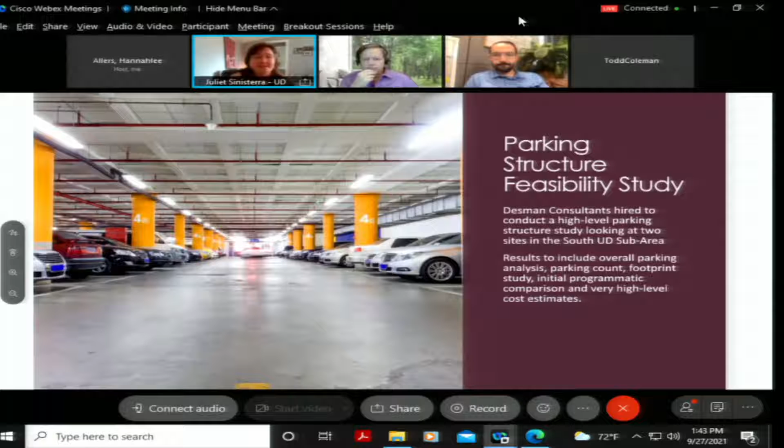We have two studies moving forward. The first is a parking structure feasibility study. Those involved with the UD for years know I was on the development committee in 2016 and 17, and we were talking parking structures then. We finally have high-level feasibility studies going on, analyzing parking counts, costs, egress, ingress, that sort of thing on a couple sites in the UD.

We're also moving forward with a TOD study with center-based planning and urban design, the same group, Jason Graff, that did the work for planning. We're having him look specifically at the Pine Street station, the BRT station there, and how build-out at that end and also at Sherman and Sprague could ideally encourage taking transit and more pedestrian and walking use. That is moving forward, it's like a four-month study.

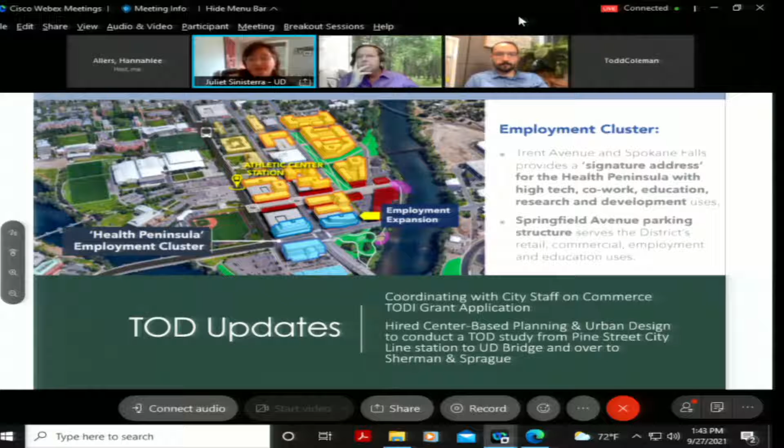We're coordinating with city staff on a commerce grant as well around TOD. And we've just started working with Gonzaga students on their senior project in civil engineering. They're going to be developing a UD bike-ped plan for our south area. I'm being supported nicely by Amanda and Colin Quinn-Hurst and Mike Tressider at STA, and we're meeting regularly with those students.

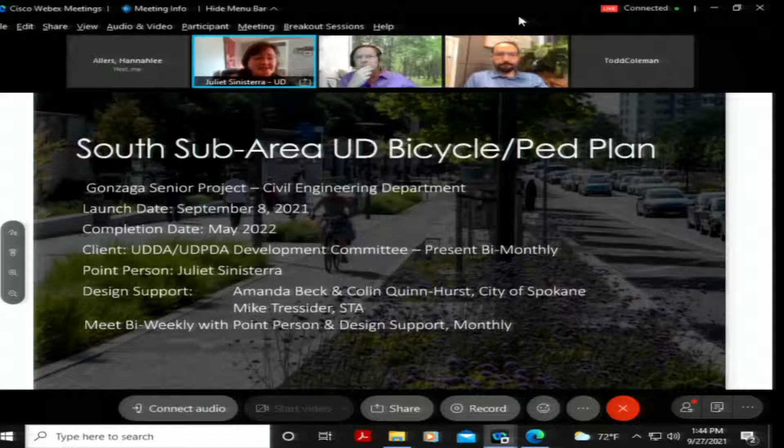Finally, we're talking with Boxcar, Catherine Miller and Kyle Tuig, about potentially the UD PDA working with Boxcar to get an initial lift of asphalt and maybe some initial curbing done along Riverside between Grant and Sherman. Boxcar wants to start marketing and leasing out properties in the spring, and they'd love it if that street wasn't just a dirt pile like it is right now. We're trying to be creative and think outside the box on how we can move this forward more quickly on behalf of Boxcar, and potentially Boxcar might partner with the UD in agreement with the city to get those improvements completed.

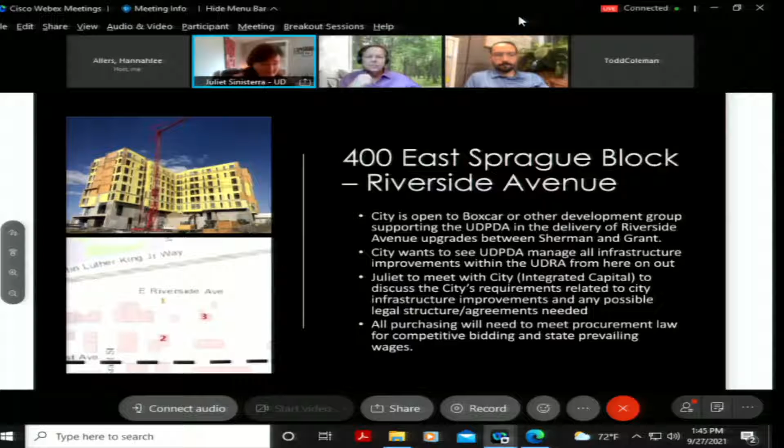So with that, that is all I have.

This is Brian. I'll just add something council is always super interested in, which is residential development in the South University District. You saw that photo of Boxcar, a very large apartment unit right at the south end of the University District Bridge. There's also a pretty big development at Riverside and Brown, workforce level housing, with potential to double in size just north of there. And farther east in the University District, the Riverbend project, which I'm thinking is about 300 units, something like that. It's pretty big. So there's quite a bit of housing going into the University District. I just want people to know that.

I'll add to that real quick, Brian. The Riverbend project is on hold right now due to escalating construction costs, so hopefully they can get back on track sooner rather than later. Both Dean Pape, who's doing the project on Brown, and Boxcar are interested in doing more housing in the UD. I've also been approached by Scott Shapiro, he's with Eagle Rock Ventures, originally from Spokane but now in Seattle. He does a lot of micro-unit housing around the country, often adjacent to university campuses. All three are really interested in doing more housing, but they also want to see more street-level activation and more uses in the UD before they jump the gun on too much more. So that's a lot of discussion we're having on the development committee, how can we encourage more ground floor uses to come in as well.

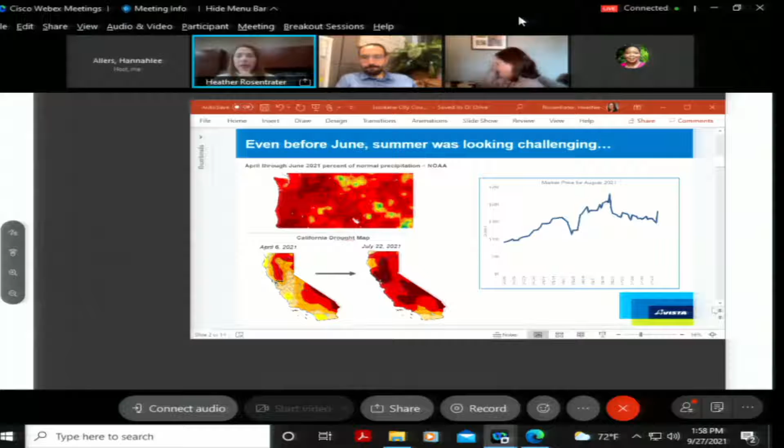Going to the next slide, as this June event at the end of June came closer, we looked at even more items on the supply side. We looked at purchasing additional power in anticipation of increased load and to minimize the market price volatility that usually comes with these heat events. We coordinated with our power plants to identify various contingencies and how we would respond to those contingencies to ensure we could serve our customers.

What was again unique about this event being in June is we normally have our generation units in a maintenance window, because we don't usually see those extreme heat events in June. So we had several units that were out for maintenance, and we focused on getting those units returned from scheduled maintenance as quickly as possible so they could be online before we experienced those peak usage days.

We were also coordinating with some of our large customers on the supply side, and Inland Empire has been a great partner, supporting a load reduction option for us that we did take advantage of during this June heat event to help ensure we had enough energy to supply our customers.

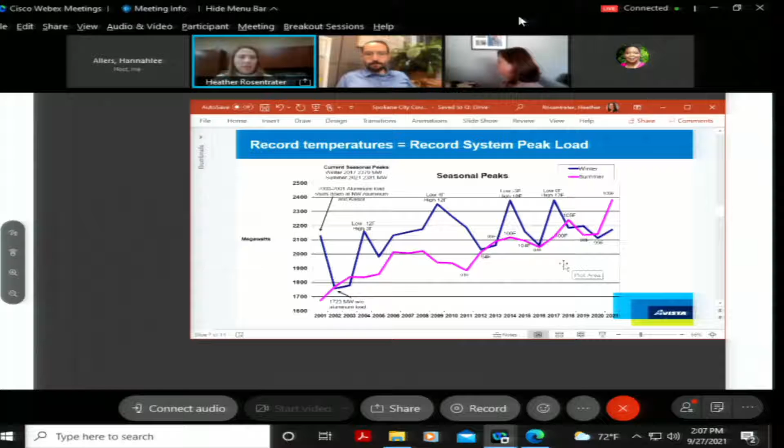A question that I've had, and I know many others have had, is how did we not see this coming? I can tell you on Monday morning when we met with our engineers and operators who are watching the system, the areas of the system they were specifically concerned about turned out not to be the areas where we had the issues.

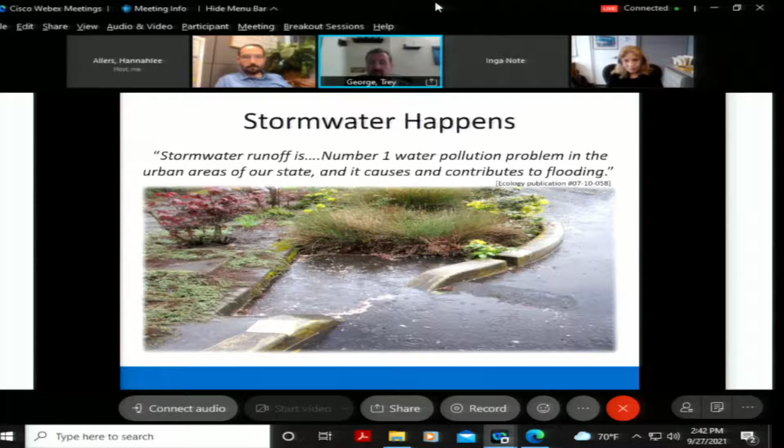So we have a permit system where ecology issues permits to municipalities. We are the recipient of this permit, the Eastern Washington Phase 2 Municipal Stormwater Permit. This is our permit number, and the permit area is the entire incorporated area of the city, with the exception of the CSO basins. The permit authorizes the city and its citizens to discharge stormwater to waters of the state of Washington - for us, that's the river and our aquifer.

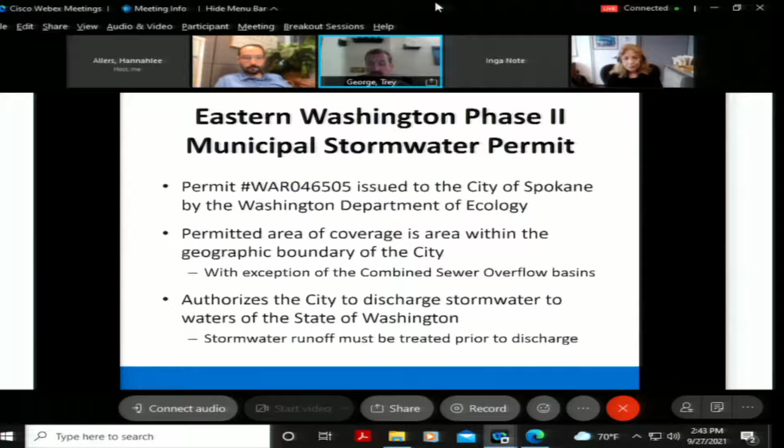A permit condition is that we must treat stormwater prior to discharge where practicable. There's an ordinance I'm going to touch on here in a few minutes where we talk about treatment and inspections, so that's why I wanted to bring it up early.

The purpose of this update is to comply with the Eastern Washington permit. We want to provide clarity in the ordinances to some language that needs it. And then ultimately, we're doing this to protect water quality for our local waters of the state.

The legislative process I'm going through with y'all is I've been to the Planning Commission, and they've provided a recommendation, and I'm presenting here today to PIES. Then I'm on schedule, I believe, for the council on October 25th. If I'm not on schedule yet, I'm getting there - I've made the request.

This is a very general timeline. We sent the letter out to affected known property owners from our permit list, created from permits we've issued for COs. The Planning Commission here, then the PIES Committee, and then October 25th, the City Council with this extended public comment period. We've reached out to the public or made ourselves available.

We submitted a SEPA for the DNS initially. We put up a stormwater webpage, which you can find on our stormwater webpage - it has another sub-page as an ordinance page. We put out a blog two weeks ago, and we put the public notice ads as required for the Planning Commission. We sent a notification letter to 350 or so properties, and we've been receiving feedback on those. We will post public ads for council. So we've tried to get the word out to get comment back, and we have gotten some comment back.

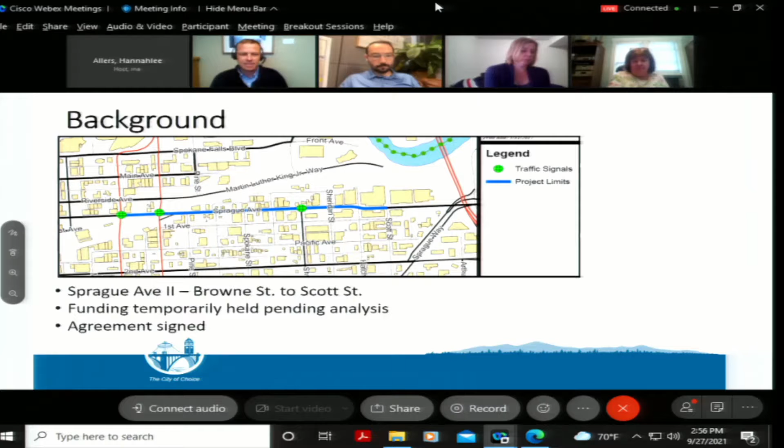Just a reminder that this originated because during Sprague Avenue resurfacing and reconstruction, funding for that project, and actually all city transportation projects from the state, was temporarily held pending an analysis of an east-west trail connection through the South U District from the University District Gateway Bridge. At that time, an agreement was signed with Senator Billig, Mayor Condon, and City Council, committing the city to explore that trail connection and sign Sprague Avenue as a shared bicycle route.

That study was a follow-up to this agreement to look into the trail option. The signage was installed, and the trail was studied as a potential connection through the district, following up on a 2015 addition to the Bicycle Master Plan.

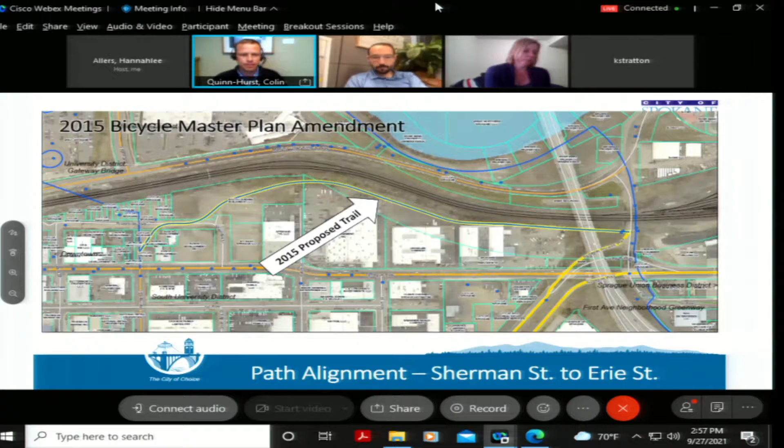What we found looking through this study in the project area were a few critical challenges. It parallels the railway and actually lies entirely on BNSF property, some of which is leased through long-term agreements of up to 100 years. That's the critical challenge with this alignment, as well as the terrain, with key challenges right on that bluff.

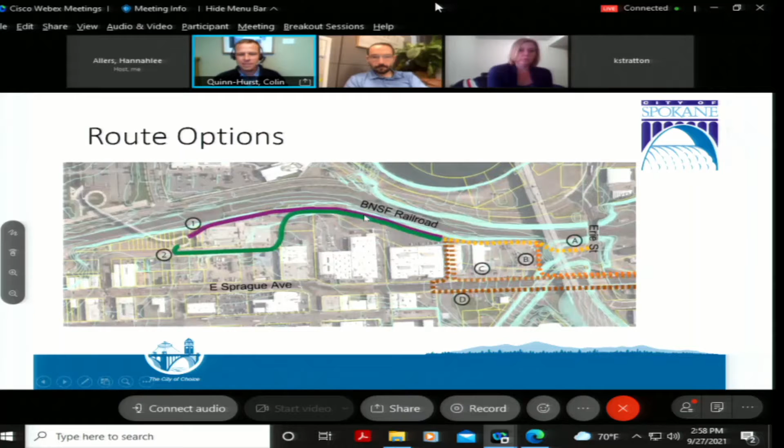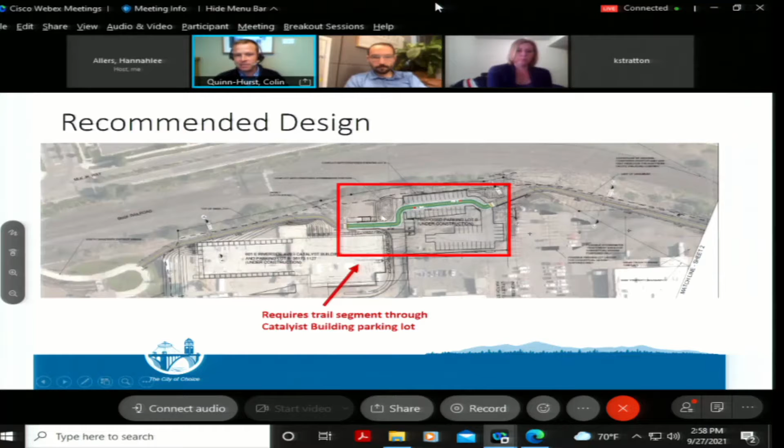We explored a few different options and routes to get people through there, and found that modifications to existing lease agreements would be necessary, along with going through parking lots, past swales, and up steep terrain. So the bottom line, going through this trail design and a full concept design, was that we found critical challenges that really led to the conclusion that it's not a feasible project.

One challenge with BNSF is that it would require a lease agreement, paying them annually for the right to use this alignment, which is a pretty rare or non-standard way of getting public right-of-way for a transportation purpose. It's not something we'd usually consider doing.

The other piece that came out of this process with stakeholders was that we'd need to replace any parking lots affected, as there would be some lost spaces.

So moving forward, a parallel option has emerged through other processes, specifically a bike-ped safety analysis done for a state DOT grant application last year, which you were briefed on, including crossing improvements at Division and Browne. Those flashing crosswalks by the House of Charity are really dangerous crossings. Three other crossings were approved for funding through that grant application, but there was a lot of interest in this crossing as well.

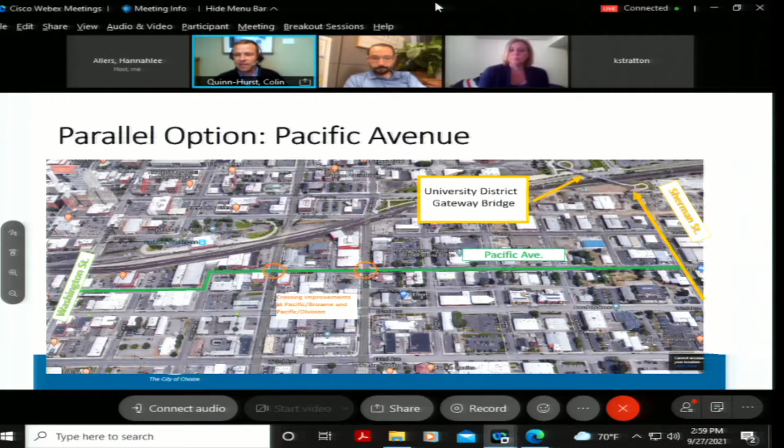We ended up proposing it as a neighborhood greenway improvement, since Pacific Avenue is currently in the Bicycle Master Plan as a bike-friendly route, providing connections from the University District Gateway Bridge area on Sherman into downtown, with options for extending east. You can see some of the current alignments are low speed, low traffic, but the crossings really are the key points, with options for connecting east down on Sprague Way under Hamilton using some of the design concepts from the trail study.

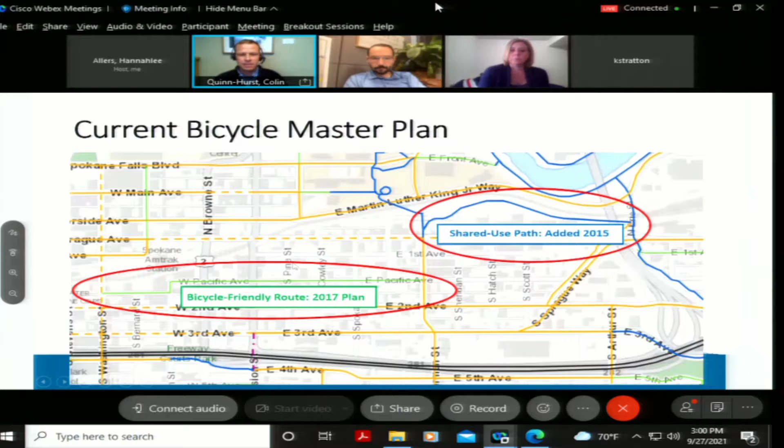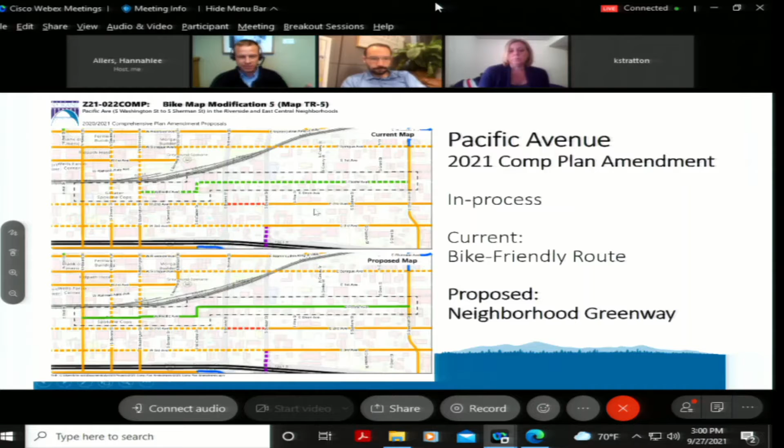So you can see what our current bike master plan says, and what we'd like to do is upgrade that Pacific Avenue route from a bike-friendly route to a neighborhood greenway, through a comp plan amendment going through this fall that will come before you shortly. This would include traffic calming elements and crossing improvements, making it a higher level bike route that's on par with, or in some cases better than, a shared use trail, as recent research indicates it can be safer.

After this current amendment upgrading Pacific Avenue, we'd like to look at options for doubling down on that alignment as a neighborhood greenway connecting west into downtown via Howard, and east to the Sprague Union Business District and the Ben Burr Trail, continuing on bike-friendly routes through the Sprague District to connect with the Children of the Sun Trail where it touches down by the Libby School.

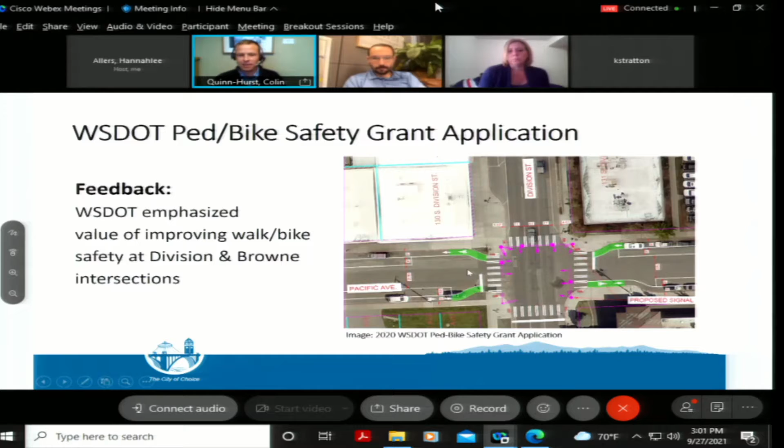So it could be a true east-west bikeway and walking and biking connection. We'd like to look at that and come back and continue pursuing funding. And this isn't just a few sharrows, it's really signal improvements, bikeway improvements, protected intersection options, and ways to really make this a very safe route.

This was included in the legislative request. It was one of the top 5 projects that went in on that list this year through City Council and the legislative team, and it was supported by the Bicycle Advisory Board. They preferred this option over the trail option. They felt it would connect better to destinations in the community and was a safer route that appealed to them more.

So we felt like the review was fulfilled by the feasibility study, and that by continuing to pursue a neighborhood greenway along Pacific with better connections than that initial study route, that we'd be following up on that agreement. So probably longer than you wanted, but I just wanted to get through this real quick. Our proposal is to continue focusing on this, but also follow up with Senator Billig, confirming the conclusions that we found, really close that loop, and propose some next steps to see where that conversation can lead.

So Colin, are you looking for specific feedback from council related to this project? Yeah, feedback would be great. I'd like to hear what you think of this approach. Can you send this out to us? Can you email your PowerPoint out to us, and then we can get back to you? Absolutely. Perfect. We'll include the draft letter too.

Thank you, Catherine. I don't see any other hands for any questions. I don't know if they're giving us the high sign in council chambers or not.